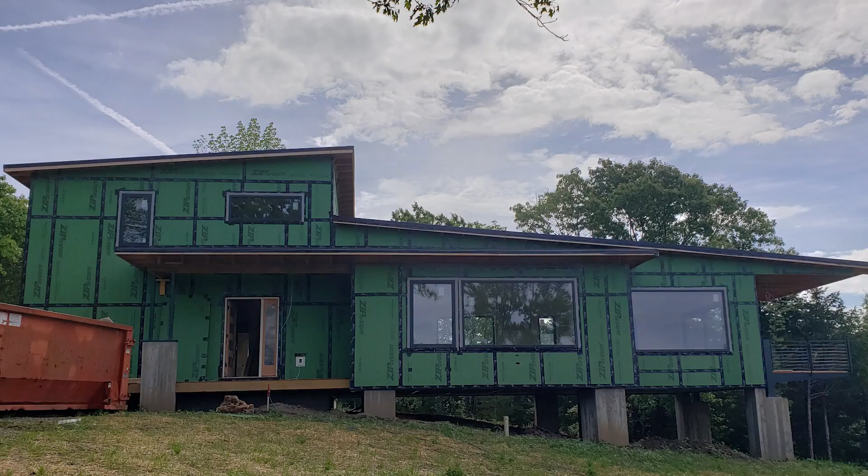So I have the Hilltop Arrow House behind me. You can see it's a beautiful green box, right? Zip would love to hear me say that. But the reality is this is what I call the Alamo situation. The weather-resistant barrier of the zip sheathing is the Alamo. That's the last place that I'm battling water. Remember, water is the number one killer of buildings.

So we know on top of the weather-resistant barrier, or the green zip R sheathing that we have here, we're going to put a rain screen, we're going to put siding, we're going to paint the siding on the outside of that. But keep in mind, in my mind, as an architect and building scientist, the siding is the sacrificial layer. That's the layer that the sun sees, that the rain, ice, snow, all of the environmental conditions that challenge our houses, the siding takes on that battle.

And water is inevitably going to get behind the siding. I know there's a lot of people out there that are going to say, oh, I caulk it really well and I seal it up. To believe that the siding is a face-sealed system and a water barrier is about as naive in building as you get in myths and stories.

Water's getting behind it. So how do I deal with that water? I put a rain screen on there. What does the rain screen do? Well, it provides drainage, but it also provides ventilation. And on the back side of that rain screen is the Alamo.

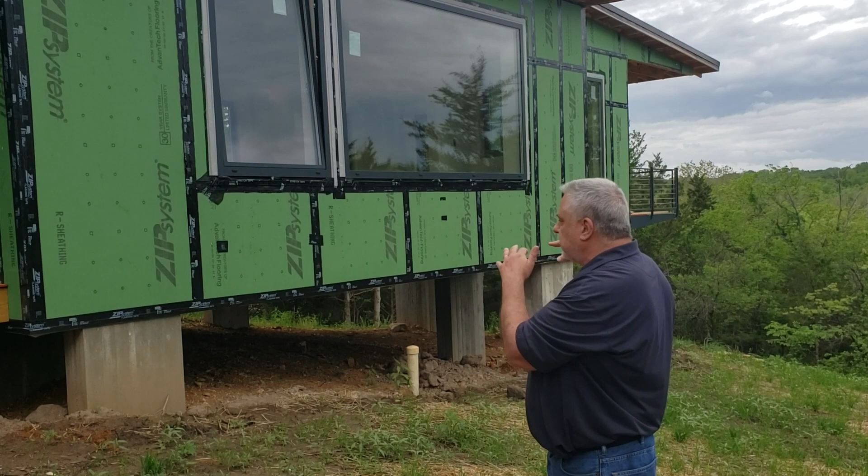When I look at this house, I see a house that's fully sheathed. I see the windows installed. I see all the joints taped, the windows flashed. The windows from a water management perspective. In my eyes, water management is taken care of here. I should be able to take a hose down the house right as it is, and it should be successful. Everything that I do from this point on is in assistance to the war that the weather-resistant barrier is fighting.

Let's jump back to the studio. I'll break out a simple wall section. We're going to talk a little bit more about rain screens and siding and the Alamo and how we put buildings together to battle water. I'll see you back at the studio.

Hey, everybody. So hopefully you enjoyed that little trip out to the job site there, Hilltop Arrow, being built by Arrow Building, owned by Jake Bruton, good friend of mine. He's doing a beautiful job out there. Always like working with Jake. He's a really good collaborator and teammate. So we have a lot of fun together, which makes it even more important.

Speaking of fun, collaboration, guess who's here? Big Red. We're going to dive into detail, and we're just going to talk about some basic water management concepts.

But before we dive into the details, you know, I can't stress enough, I've been in this business almost 30 years in the building industry. And as much as you tell everybody water is the number one killer of buildings, next year there will be literally thousands of buildings dying a slow death due to bad water management. So it's something we can never talk enough about and strive to get a better understanding of. So anyways, number one killer of buildings. Let's talk about it.

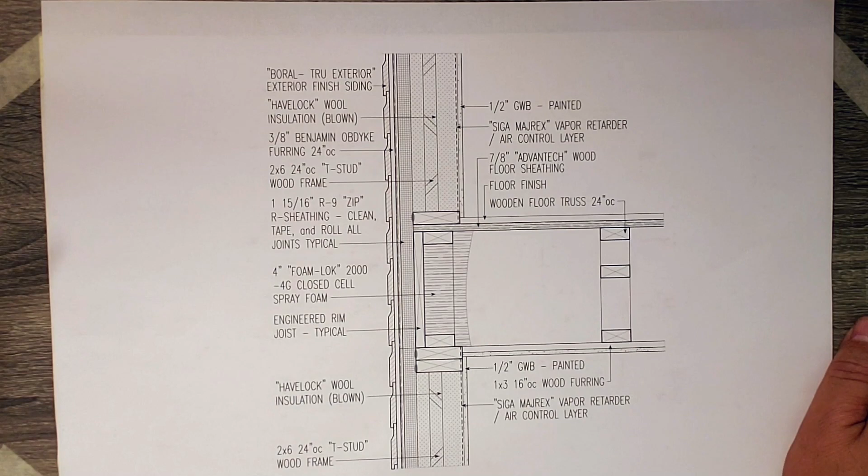All right, so grabbed one of the details here. It's a band joist detail, wall section detail from the set of drawings. You can see there's the bottom plate of the second floor. Give you a little orientation. And the double top plate of the first floor here. Band joist here.

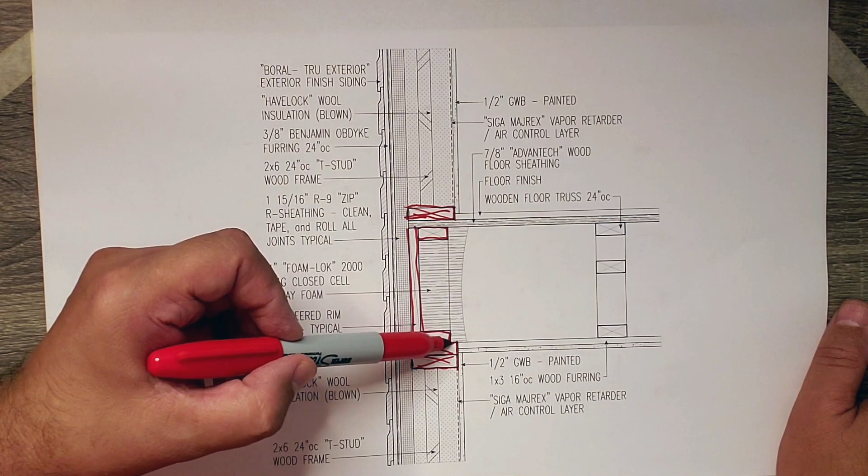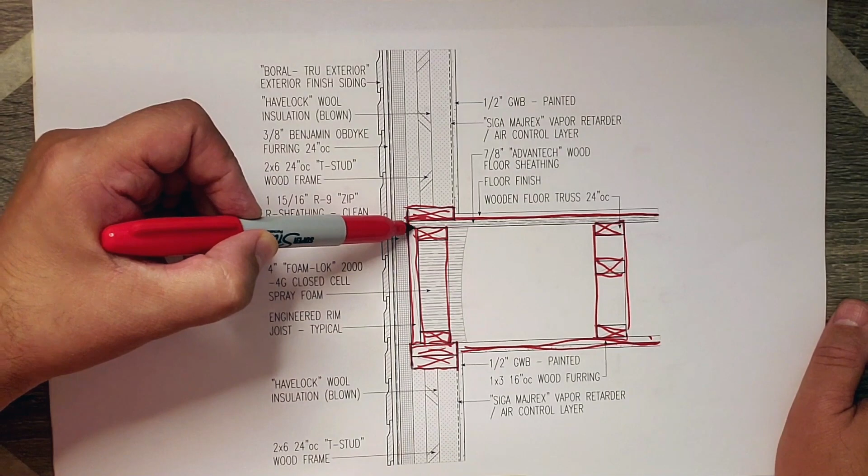And this is our floor truss in there with another floor truss there. And our gypsum board ceiling here, and then this is our floor sheathing up there, so you get a sense of what's happening there. So that's our floor assembly, and then for the wall assembly, you can see we have our...

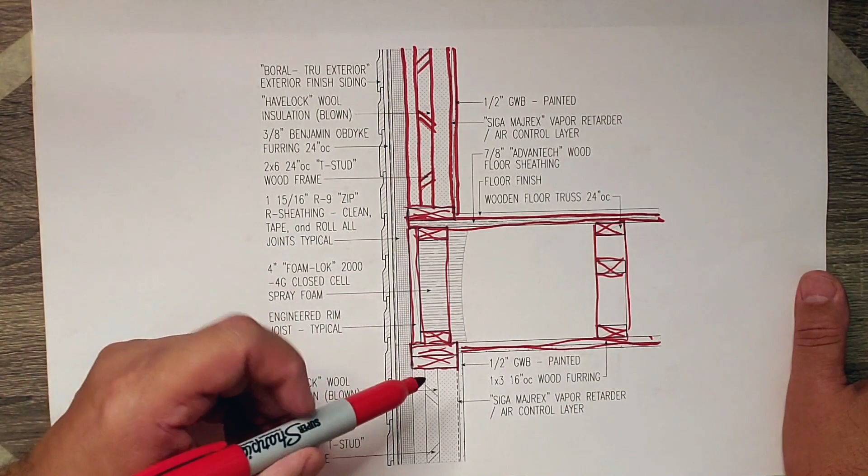T-stud. So that's the short chord, long chord, another gypsum board there, and then the dowels that make up that T-stud here. Let's see those dowels in there. Wide chord, and then a gypsum board there.

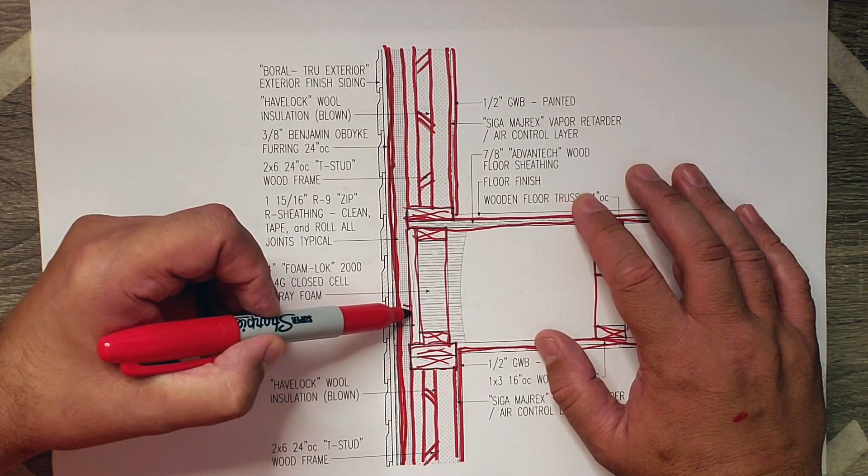And you saw there we had the green zip board on there as our weather-resistant barrier, and that's basically right there. And then we have a layer of insulation in there, so we're using the R9 zip panel here. And then, like I said, this is the T-stud frame. But what we're really talking about is what happens when water challenges this siding. How do we prevent it?

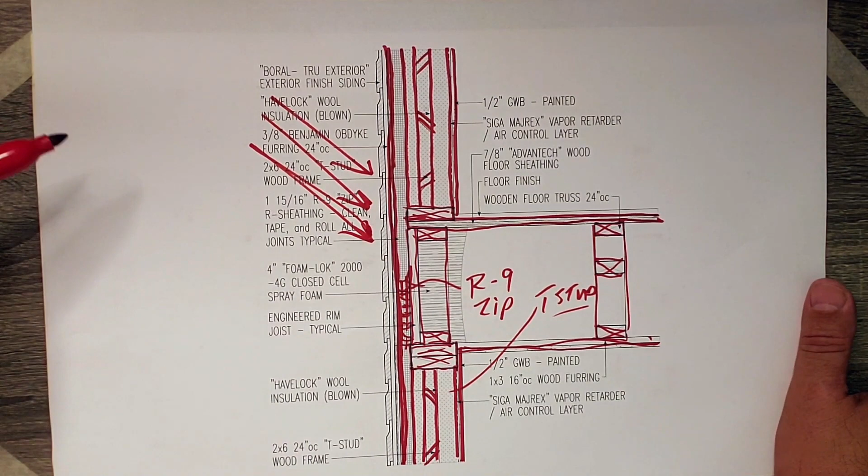Now, typically, a lot of builders you'll see, they put up their plywood or OSB, they put up their weather-resistant barrier, which could be a roll-out paper membrane. In this case, it's zip, all taped up. And then they apply the siding to that. But in the case here, we actually have a space here, and that space is roughly 3/8 of an inch, and it's created by a product by Benjamin Obdyke.

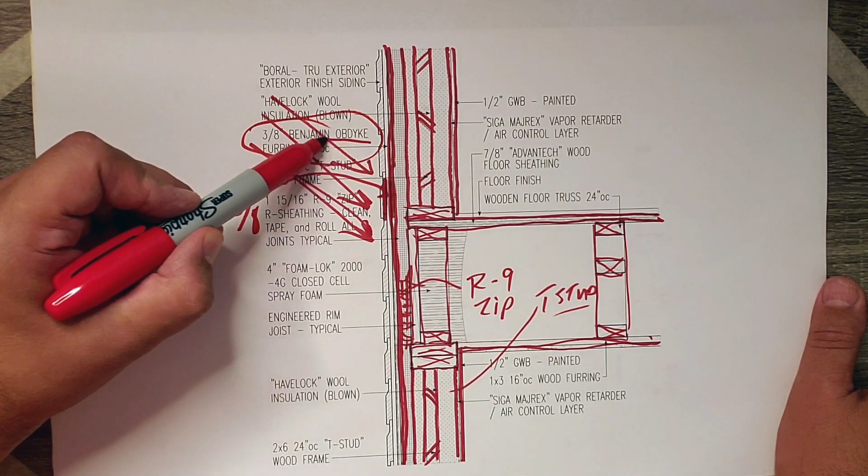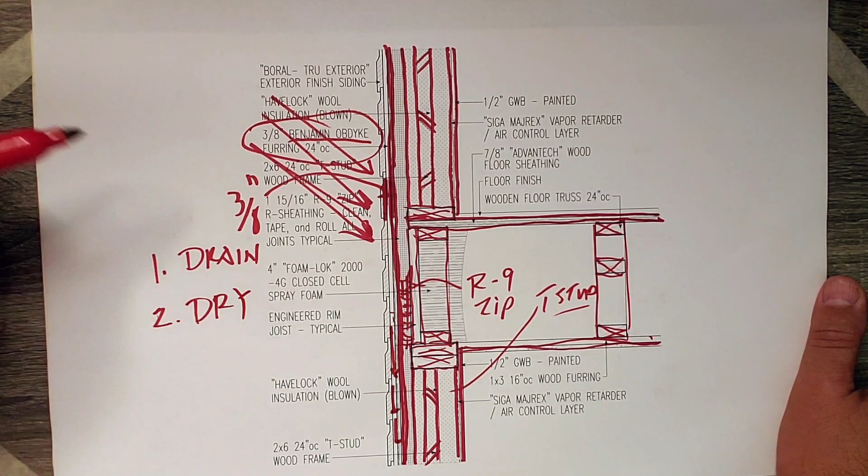They make these plastic furring strips that you can use either vertically or horizontally that provide a space behind our siding and the weather-resistant barrier there. And that space actually has 2 points of interest. The first one is it's a drain, right? It allows water to migrate down due to gravity. But 2, it has the ability to dry. So while the water is falling, you have air going up that channel and helping to dry out the backside of the siding, and if any moisture migrates into that zip board, they both have the ability to dry out. So you basically have a channel with your siding here and your zip sheathing there, but they both have the ability to dry out, and water has the ability to drain out.

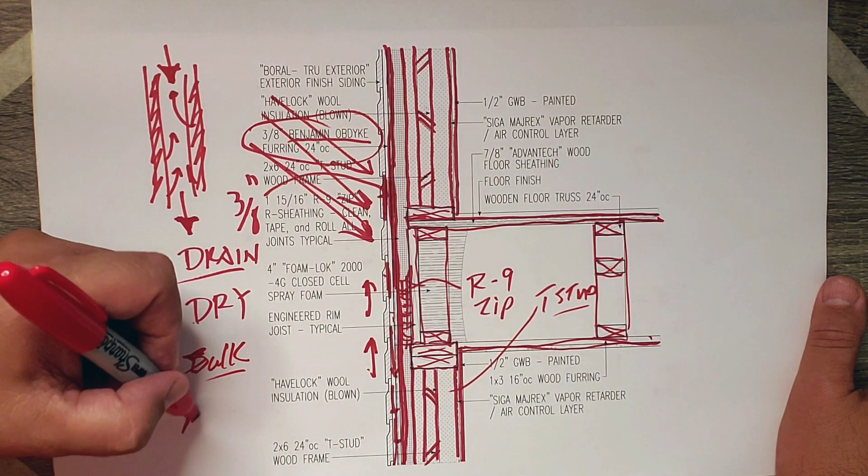So I call it down and out for the drain, and for the dry, it's up and away. So both are mechanisms to get rid of moisture. Obviously, the drain is to get rid of bulk moisture, or basically water, and the dry is to get rid of moisture vapor, right? The drying potential of the wall.

Now, as I said in the video, I know there's a lot of people out there that say, oh, we caulk and we make sure we seal up our siding and we don't get any water through there. Well, like I said in the video, I'm from the idea that that's about as naive thinking as you get. Water is getting behind the siding. It is going to get there, no doubt, and it's going to get behind the siding. Now, one of the issues I have with sealing up the siding is beyond the fact of the naive nature of that thinking is...

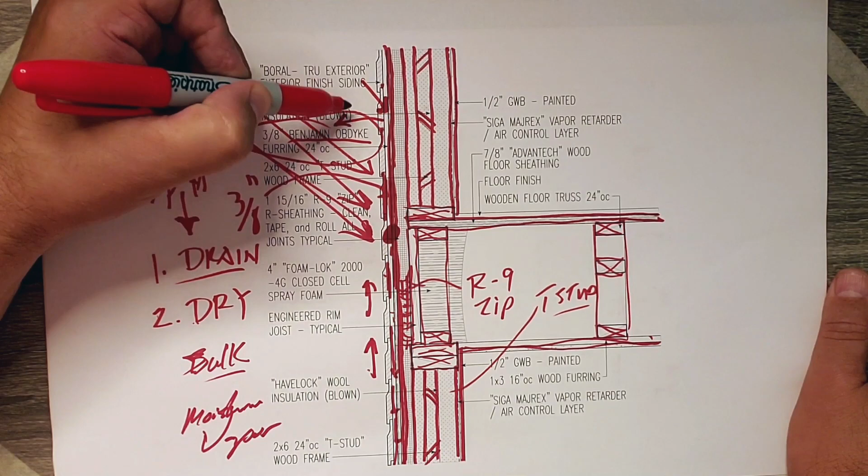I always tell people, when you're trying to seal something out, you should really be aware of what are you sealing in, should be the question you're asking. For those that have seen a bunch of my videos, you know that I'm really keen on what questions I should really be asking. So it's not really about sealing water out, because if I do some excellent job and I seal up all these joints and I basically create this water barrier myth that I think is happening, well, the instant water does get into that system, then it tries to dry out, but it can't, right? Because I've done such a good job trying to keep water out of the system. Once it gets in, the water can't get out.

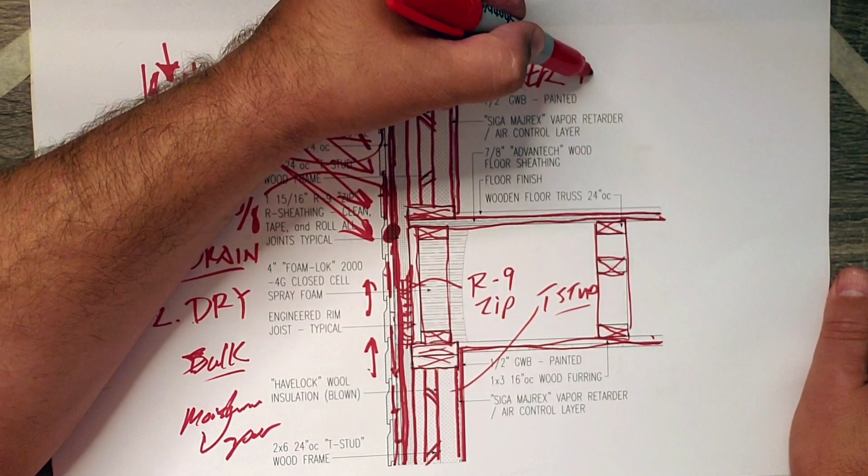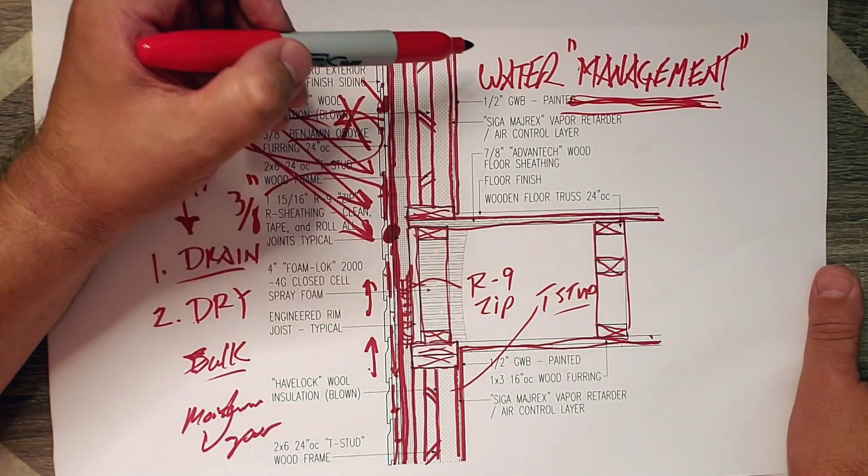So there's a reason why we call this water management. I know it's always a treat to have to spell while on video, but, right? It's not called water barrier. It's not called water dam. It's not called water stop. It's called water management. And why do we call it water management? Because we're managing the water. We have to give it a place to go, drain, and a place to dry out should things get wet behind our system. There is no such thing as a water barrier.

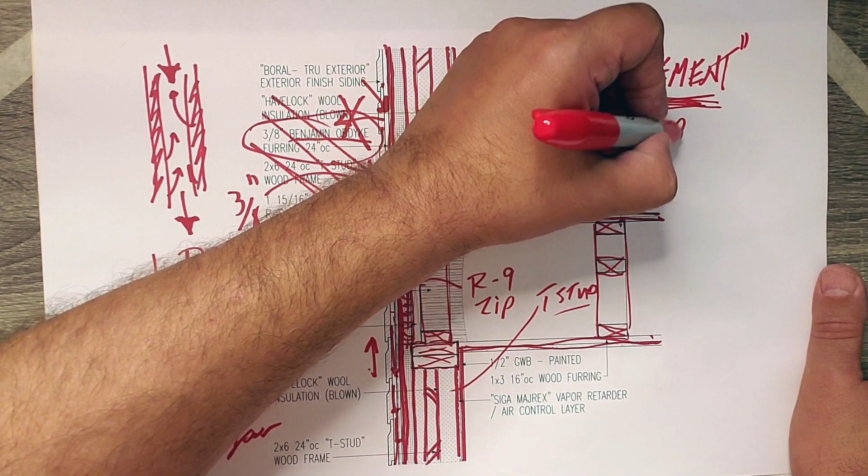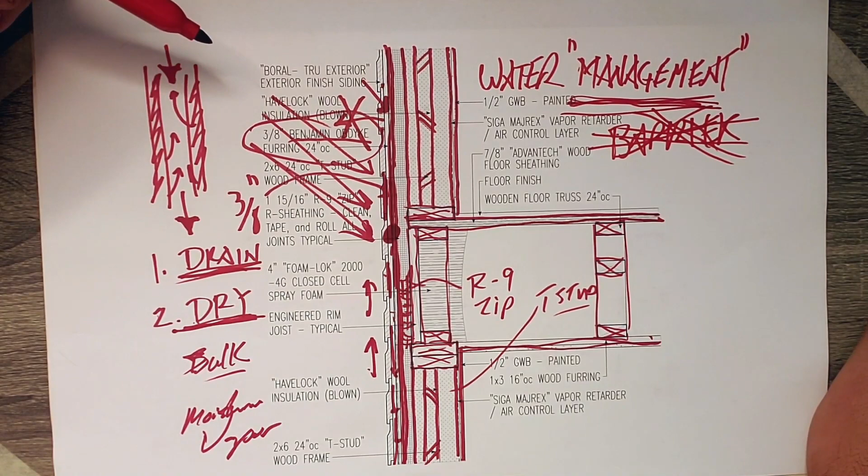It does not exist in a wall assembly. Now, you can think you create it, and it might even make it 1 year, 2 years, 3 years, 4 years, 5 years. But in a 50 or 100-year life cycle of this house, it is not going to make it. Mother Nature will win that battle. We need to concentrate on management.

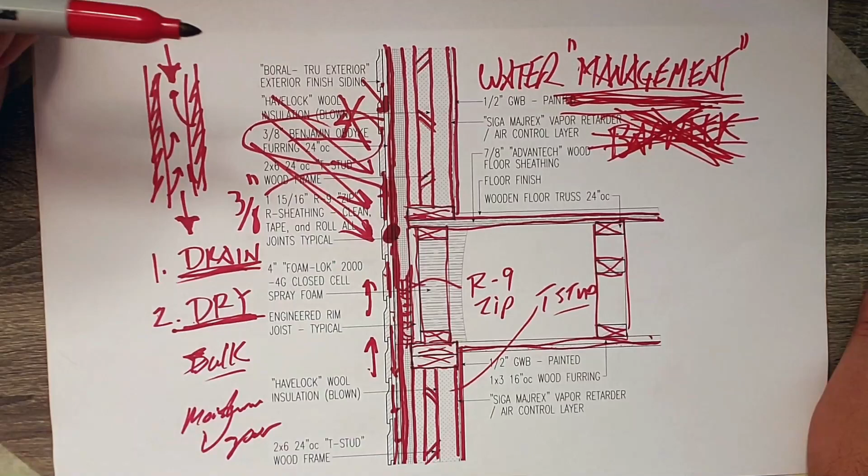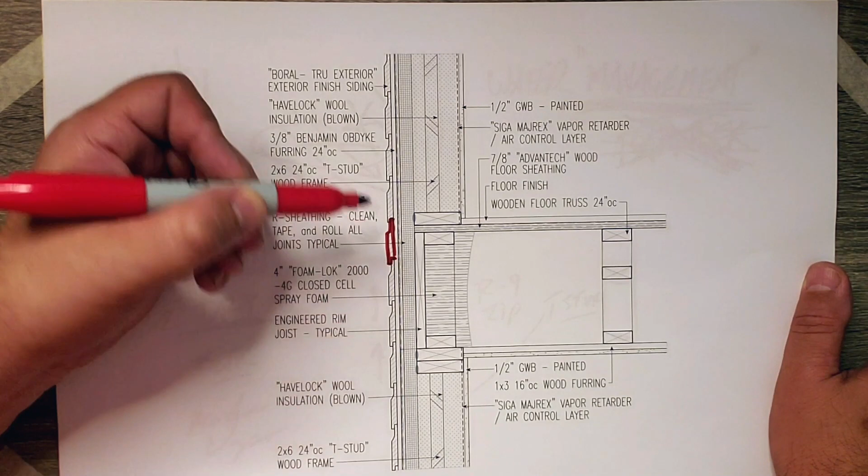So, how do we do that? Well, we have the siding, and I colored over this pretty much. Actually, I have a second one here. Let's do this. We'll throw this right over the top. We'll have a second one here. So, we have our siding. Notice the siding has a nice little lap joint. So as water hits that, it drips into the next one. There's a little cove here, kicks it out, drips, kicks it out.

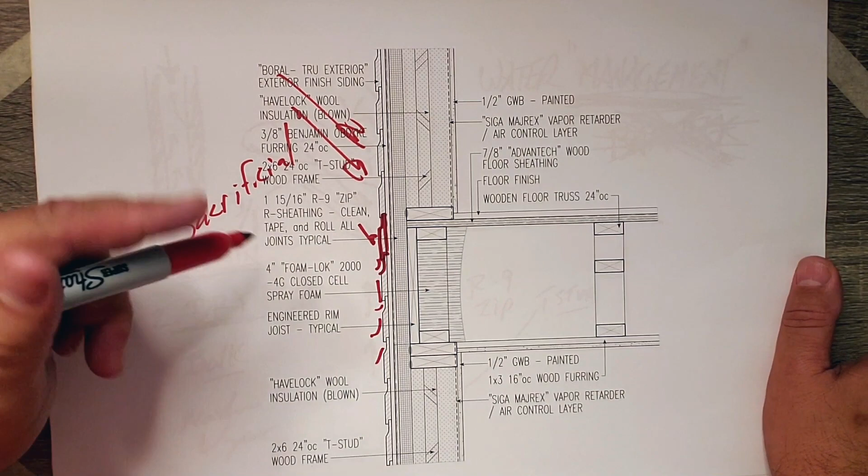So the siding is what I call the sacrificial layer, right? That's the one that takes the water, it takes the ice, the snow. It's the one that takes the sun, the sunshine, the UV, all of it. It's the sacrificial layer. It's what we put out there to basically take the beating.

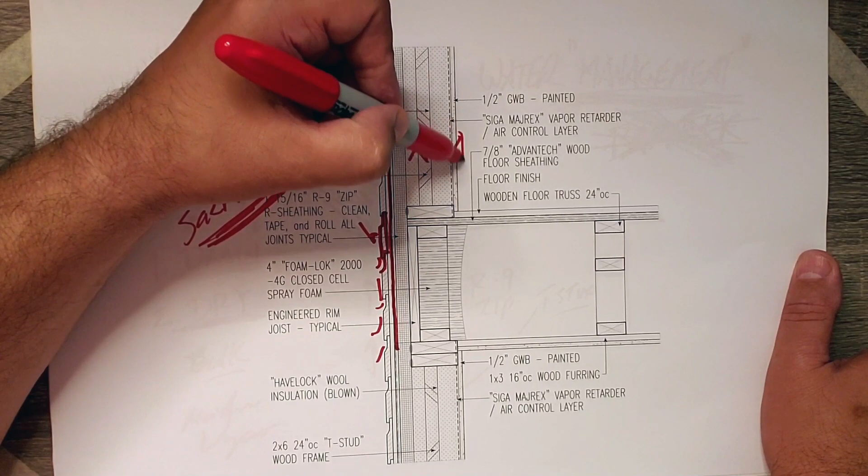Now, when I was out on the job site, I called the face of the zip here, I called that the Alamo. And the reason I called it the Alamo is because that is the last stand before water becomes a problem for me. But even though I consider it the last stand and I'm calling it the Alamo, I want to get rid of as much water before it gets to that face as I possibly can.

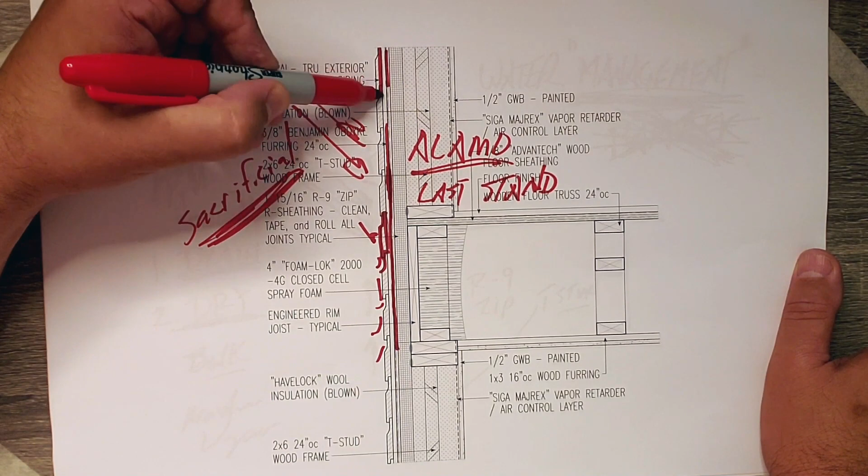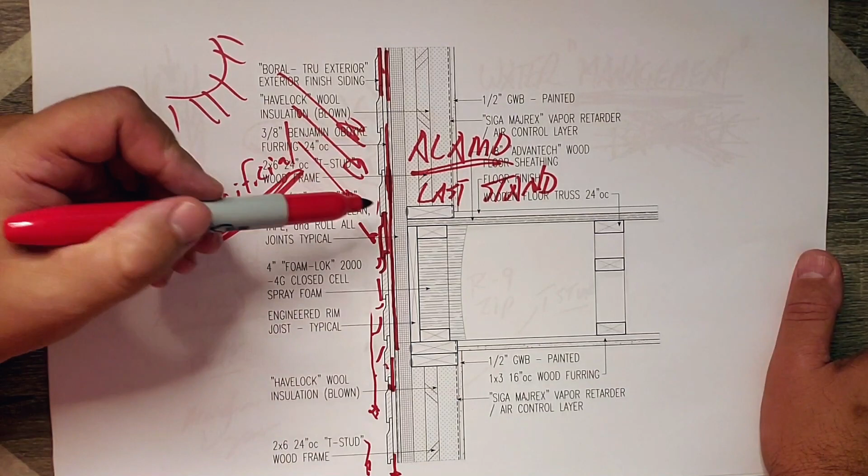So I put the siding out there. I put that 3/8 inch Benjamin Obdyke spacer in there so that we get our drain and our drying potential that we talked about before. But so when it rains, we get the bulk of the water. It just runs down the wall and drips off. Whatever makes it through the siding, which it will, comes down through that little drainage space and drips out through the bottom. So nothing is ever really challenging the face of that zip sheathing.

And again, we use the R9 sheathing. Notice that I call for all the joints to be cleaned, taped, and then roll all the joints typical, right?

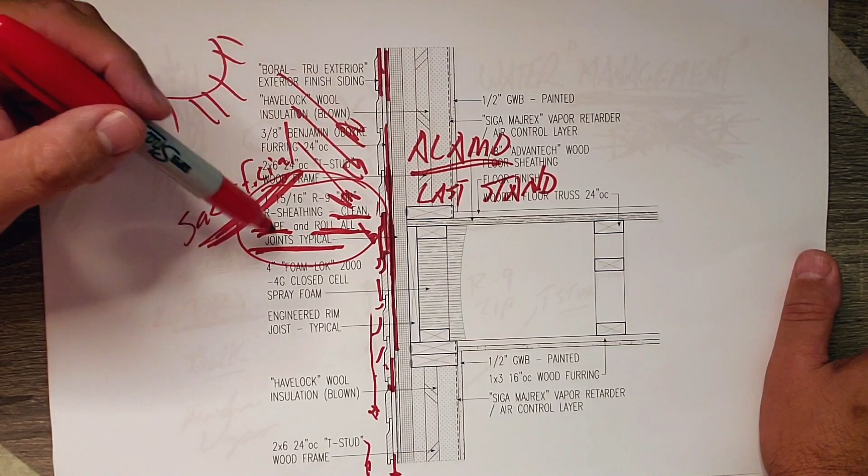It's very important that when companies like Huber develop products and say the surface has to be clean, and when you put the tape on there, the joints need to be rolled, that we do that because that's how the system was designed. But that's Alamo thinking.

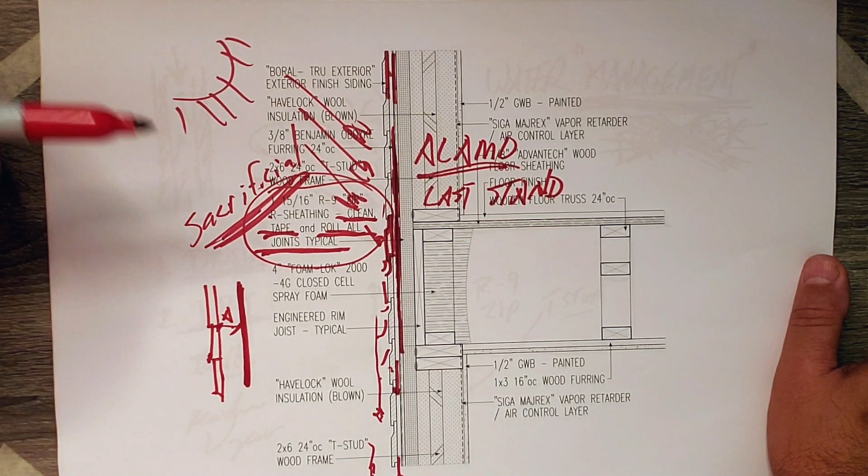Another way to think of it is that I have the face of that R9 sheathing here, I have the airspace here, which we'll just call A, and then I have the siding here. So it's actually acting like what some people would consider a two-stage joint.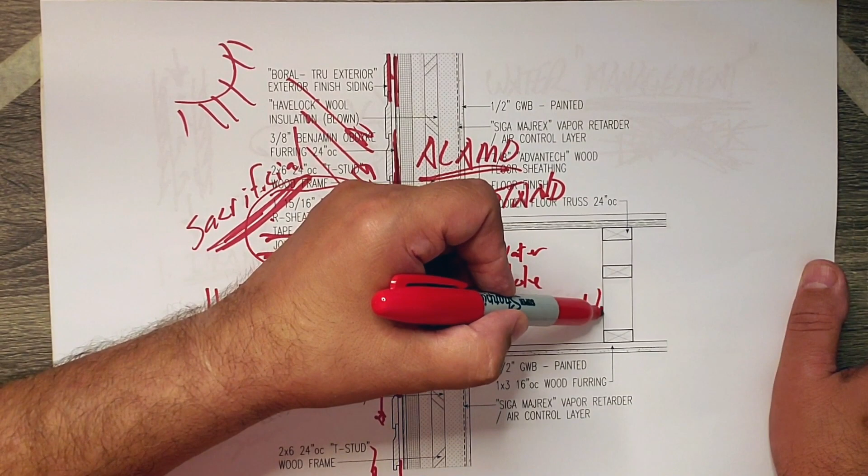What do I need to get water to move through a system? Well, I need three things. One, I need the water. Two, I need a hole. And three, I need a force. In this case, it could be wind, it could be capillarity, it could be a whole bunch of things getting in there.

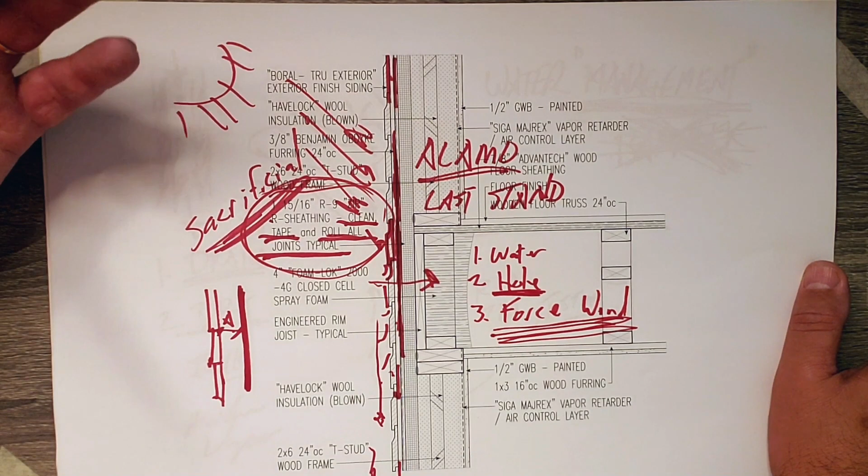But before I get to the force, let's try and eliminate the holes. We do that by taping the joints. Now, I don't deal with the field nails on the zip sheathing. We've tested them on a number of projects. We can't push air across them, so I'm very confident we're not going to get water in those holes. It might take on a drop or two here or there, but I don't think they're ever going to become a problem for water management, especially when we have this beautiful airspace here.

That airspace is acting as a pressure drop in my system, which forces the water to fall due to gravity. And that space, 3/8 inch, that's kind of a magic number in that a water droplet can't suspend itself across that space. So the water is forced to drop, it can't bridge that. If you did something a little shallower, water will migrate down, but it can also be held in there and suspended in those smaller spaces. We want that to drop with gravity.

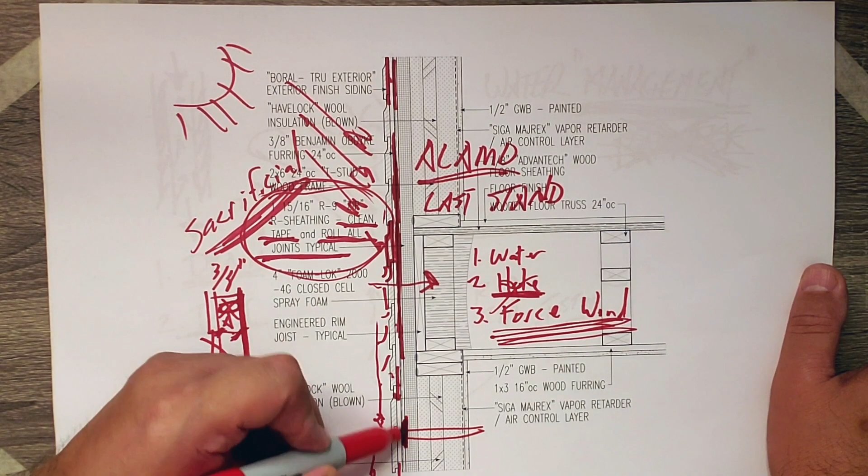So what are we doing now? I tape up that, I get rid of most of the holes, any penetrations I might have going through here, pipes, wires, all of that. I have to do a good job flashing at the surface of the weather-resistant barrier, or in this case, the zip, or what I'm calling the Alamo.

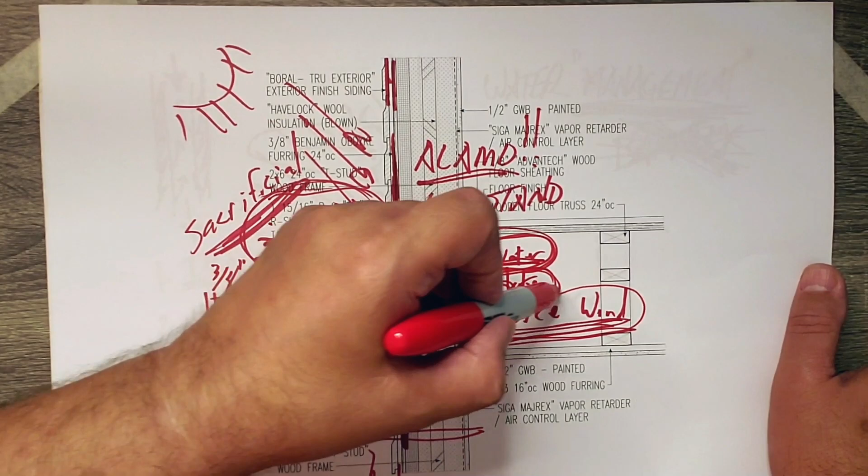But this drainage space, what it's really doing is getting rid of water. So if I get rid of the water and I seal up the holes, having the airspace gives me a pressure drop where I basically get rid of a bunch of the forces in action. There's still some capillarity and some things that can happen there, but if I get rid of the water and I get rid of the holes, then I really don't have a potential for any leaks.

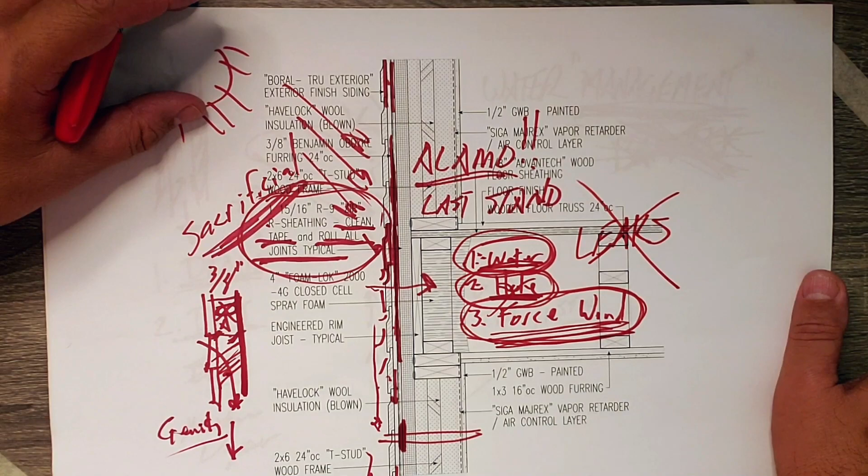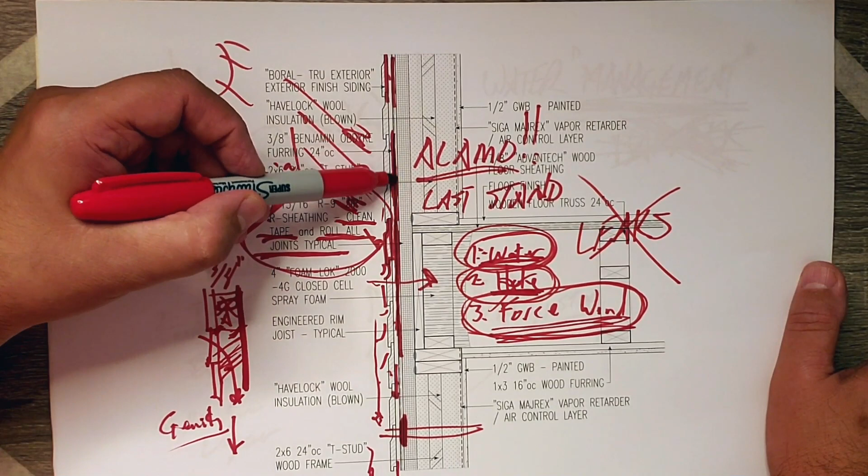So what have I done? I've created a water management system that puts my wall assembly in a position for success. So that's what I call the Alamo. Get that weather-resistive barrier in there in whatever case and material you want to use. In this case, it was that Zip R9 sheathing, but getting that airspace in front of it behind the siding is the most important part of that whole assembly.

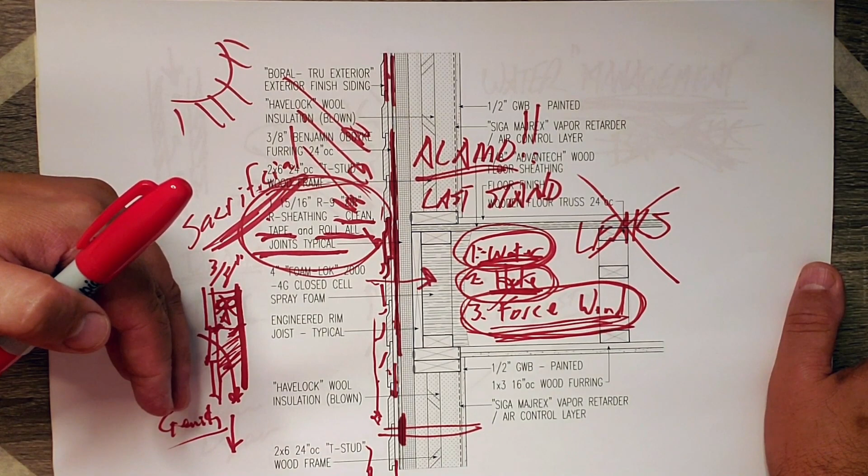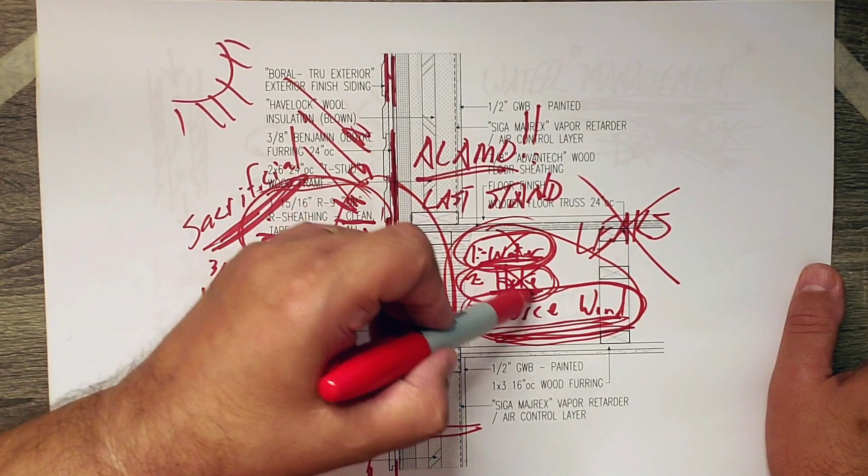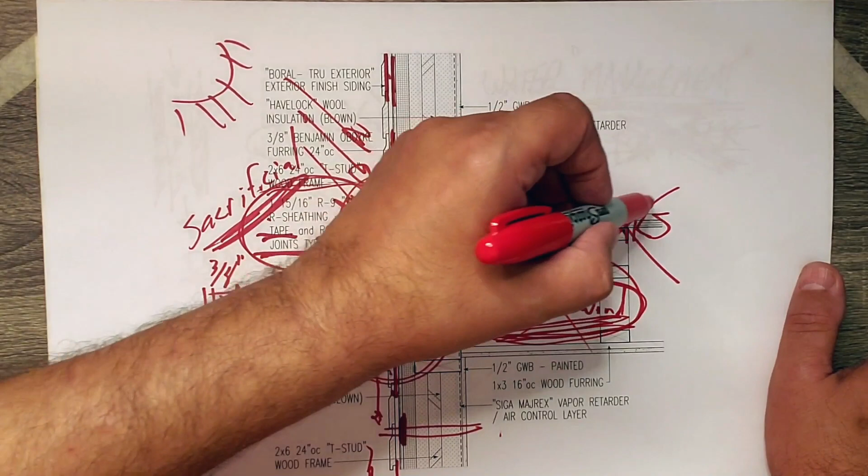And it's for these reasons: getting rid of the water, getting rid of the holes, and getting rid of as much of the forces that will act upon that as possible. If I can get rid of 1, 2, 3, then I get rid of leaks. And if I get rid of leaks, I have a successful water management system. So there you have it.

All right, Big Red, going to bed. Hopefully you guys enjoyed that video. Anyways, again, water management is the #1 killer of buildings. I can say that 1,000 times. And believe it or not, we'll still have some buildings to investigate next year and some problems to look at due to water management. It kills us.